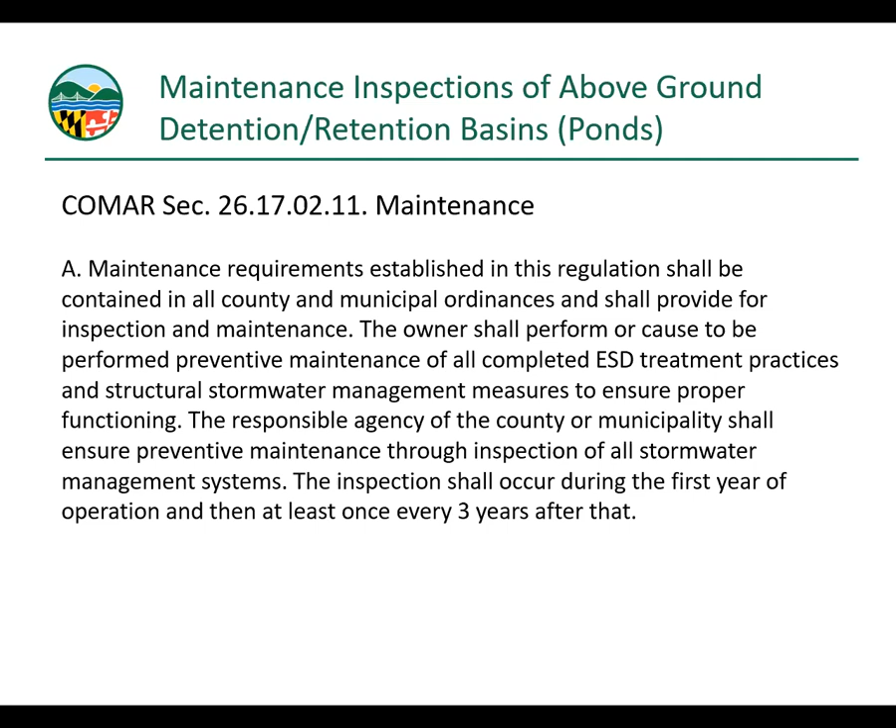So to kind of build on that, why are we doing these inspections? Well, as I just said, the law requires it. Your county and municipality shall provide for inspection and maintenance of stormwater facilities. There's many ways to get that done, as I mentioned.

Safety. Poorly maintained detention or retention facilities are a hazard to life and property. We don't want these embankments to fail and cause an uncontrolled release of energy and water downstream. For those of you operating under an MS4 stormwater permit, in order to get the credit for your facilities, they have to be in proper operational condition if they're working. And again, this is only applicable if you are an MS4 permittee.

Liability. Facility owners can be directly liable for any damage or injury resulting from a facility failure. Nobody can afford that. Nobody wants that on their conscience. So we're going to do everything we can to make sure that we're not the cause of any damage, injury, or deaths downstream. And finally, but certainly not least important, is stewardship. Why are we all here? The mission is to protect the environment and reduce the impact of human activity on the watershed. Most of us, I hope, got into this water quality business because we've got an interest in maintaining a quality environment and a quality watershed.

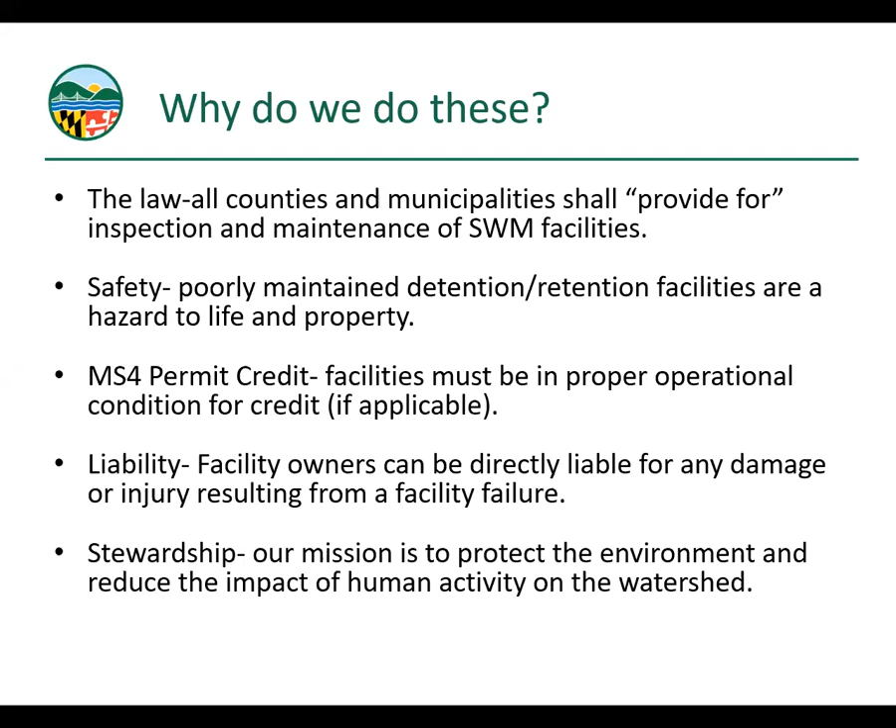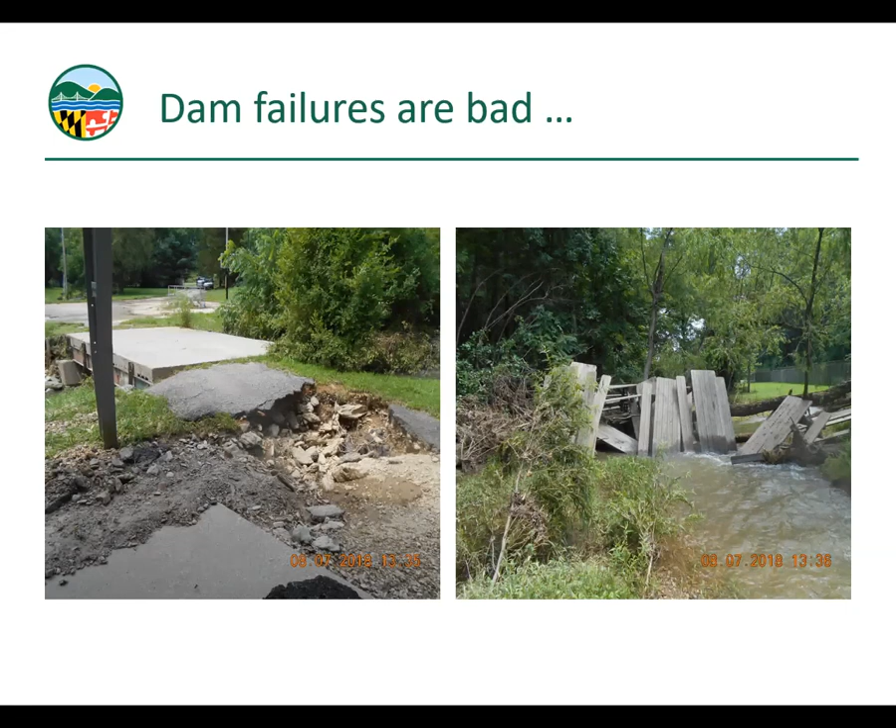So, to avoid problems, we need to inspect our facilities. Now, planning and inspection. Personally, I like to review every piece of data I can get my hands on. If you're a municipality or jurisdiction, you probably have a file or a folder on all of your facilities. Let's hope so. And in that file or folder should be all the history of the facility, starting with the construction documents and the as-built package and plans. I like to review them if they're available. If there are any changes or conditions encountered during construction that required a change to the design, layout, or means and methods, that should all be documented in the as-built package. So that's where I like to start.

Any additional data I can get my hands on, prior inspection reports that are in the file. Personally, when I'm doing an inspection and I've got a set of paper plans in my hands, I make a lot of notes on them for the next inspector to use. Google Earth has a provision where you can find a site, look at it from the overhead view, and go back in time using the timeline feature at the top. I find it interesting and helpful to see how the facility has, for lack of a better word, evolved over time.

Site contacts. Some of these facilities are going to be out in the public where you can just walk up to them. Some may be on private property, and some may be in an industrial facility behind a fence where you need an escort. Reach out to your site contacts, make your appointment, and make sure they know you're coming.

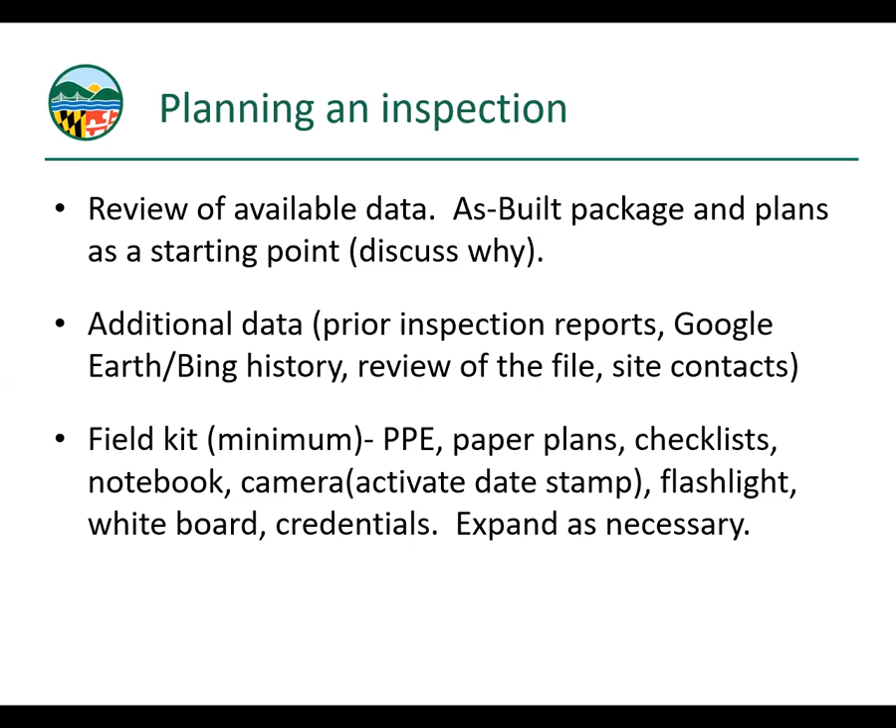And if they need to meet you there or give you access, get that set up. I'm going to briefly jump to the next slide to talk about the field kit, because this is pretty straightforward stuff. Your PPE, everybody's got to have their personal protective gear. I'm not going to speak to the conditions we're currently operating under as far as COVID, but everybody's got their own SOP for dealing with that at the moment. I've got my hard hat, my vest, and a digital camera, probably one of the most important tools you can carry with you.

When I take digital pictures, and you can't take too many, trust me, I like to set up the date stamp so it's visible on the image, so it's visible in any report or documentation you turn in. I've got a clipboard here for notes, my notebook fits right in my back pocket, a tape measure, my credentials, a screwdriver which is handy for probing the bottom of metal pipes, and there's also a pair of boots back there.

Again, this is the very basic kit, so you can do a quick visual inspection. These inspections could get quite invasive, but we're not going to go that far today. We're going to hit the high points. Anything that needs to be followed up on will be documented in your report.

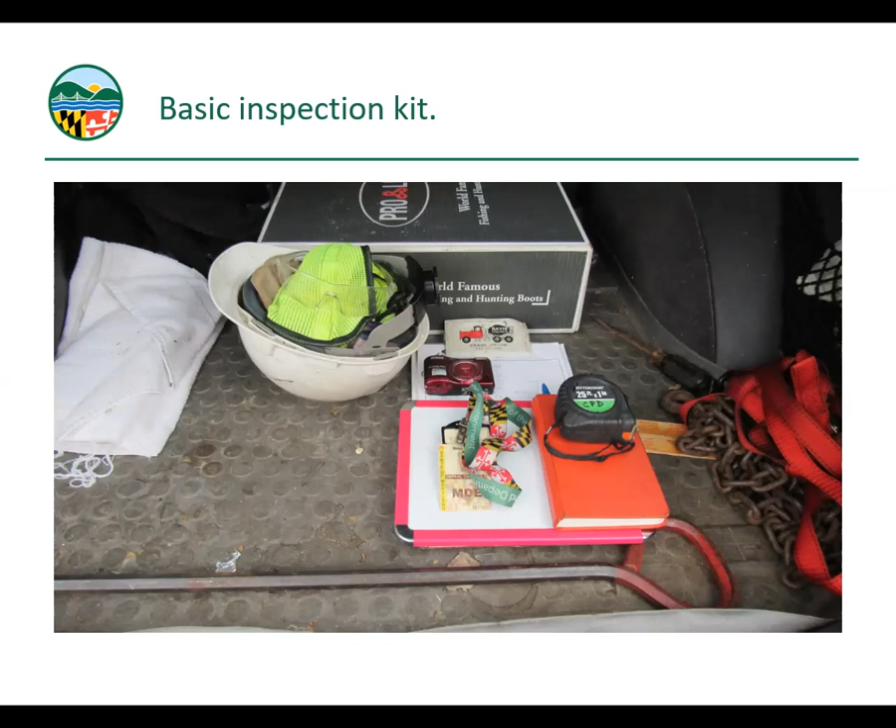So let's go to the site. All right, here we are. I like to start with an overview, just stand back and look at the facility if possible, and just take it all in.

Again, this is dependent on how your particular system and protocols are set up. But the fact of the matter is, if you can't see what you need to see, you can't inspect it.

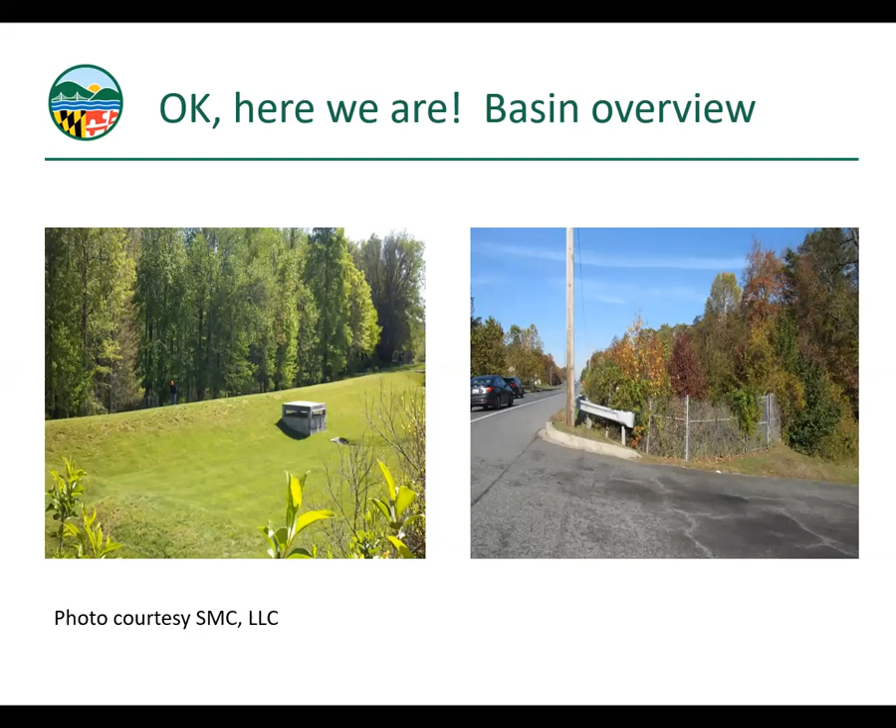And just a little piece of history, I actually worked on this particular pond when it was constructed. It has to have been over 20 years ago at this point.

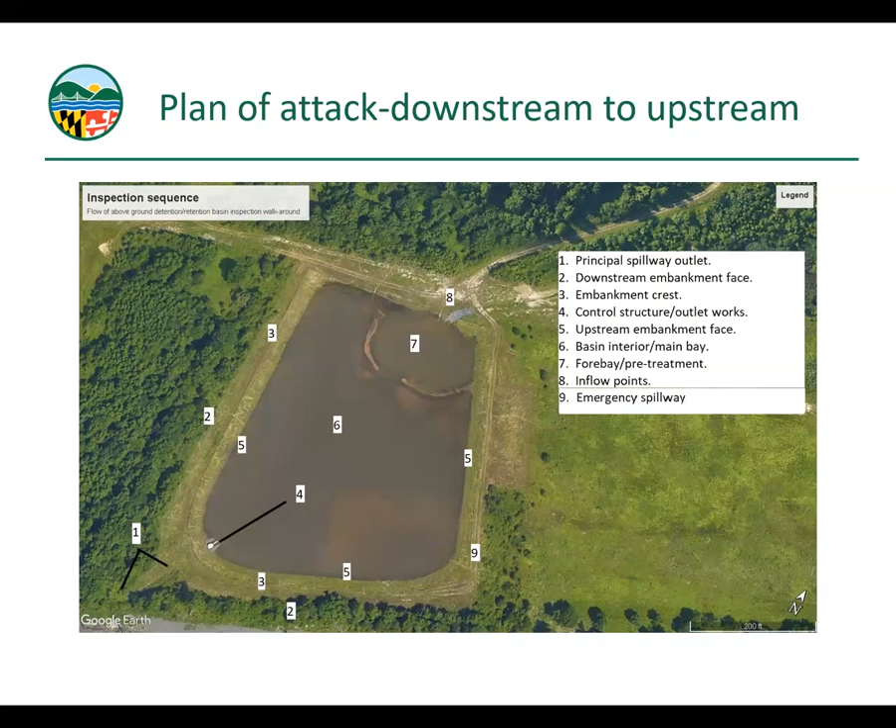So starting at the outfall and points beyond. This example, we've got a corrugated metal pipe principal spillway with a flared end section. Other than the trees being pretty close to it, it looks okay from this vantage point.

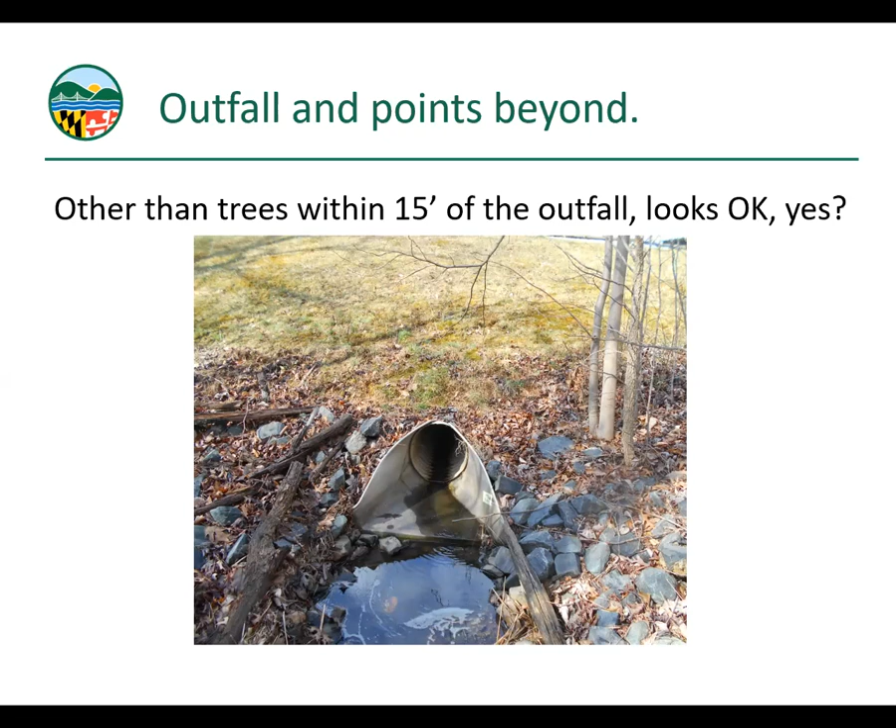But if we look downstream, what do we see? Pretty significant erosion head cutting here in the left-hand photograph. In the right-hand photograph, looking back upstream, we can see the armor at the outfall has been swept away. The filter cloth is hanging, and this cut is probably 6 feet or better.

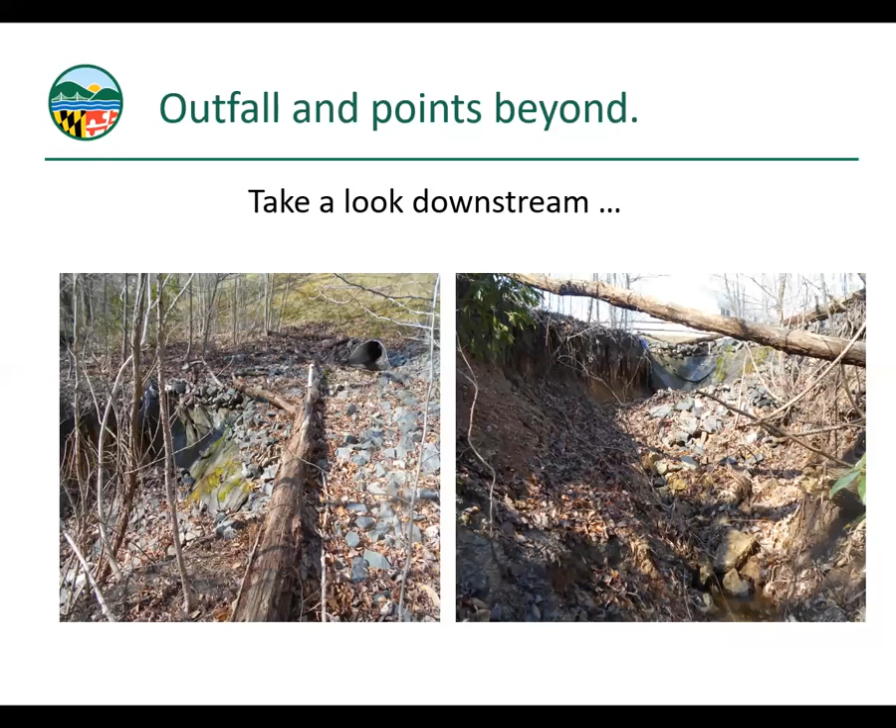Document it, take your pictures, get it into your report. We can follow up later on why it's happening. The important thing for this exercise is to document that it is happening.

How about the principal spillway? This is a corrugated metal spillway. The one on the left, it looks pretty good. It's got some surface rust in the bottom. This is a situation where I would probably probe that with my screwdriver to make sure that the metal is still intact and solid. The one on the right, well, it speaks for itself.

The entire bottom of that principal spillway has rusted away. Water is now free to carry away embankment material, and we have a perfect situation set up here for piping and a potential failure of the embankment. Again, it's pretty clear what the solution here is. The pipe needs to be replaced, but we'll speak to that a little further along.

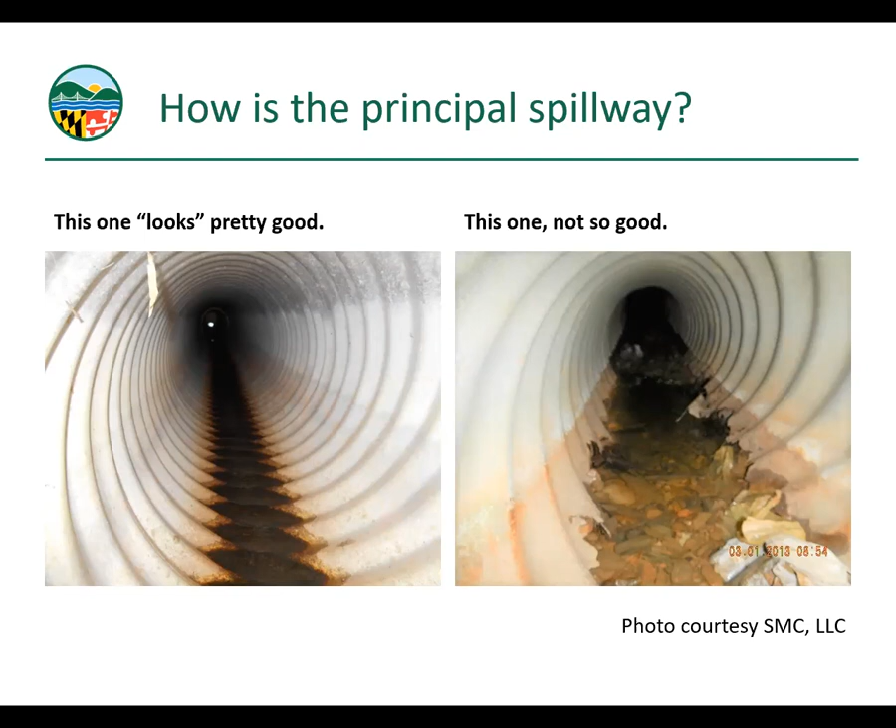Concrete spillways can have issues too. Something is blocking this spillway or is restricting it at this pipe joint. Again, in the course of this inspection, we're not going to crawl up in the pipe and see what it is, but we're going to document this. We're going to note it in our report, and it needs to be followed up on.

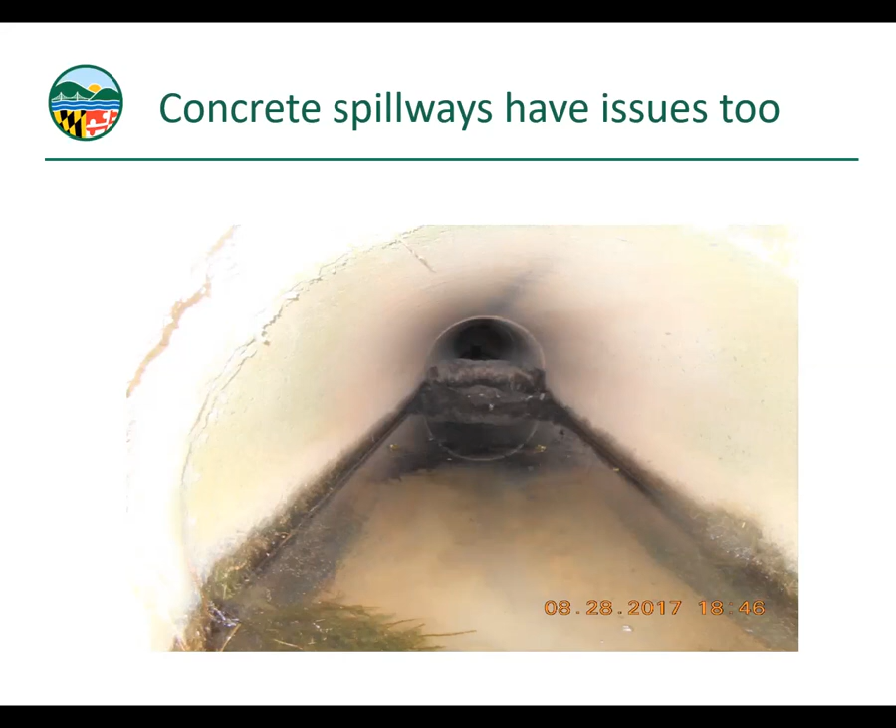Moving along, what are we looking for? A quick list. As noted, the condition of the spillway invert. What kind of shape is it in? Again, these corrugated metal pipes, folks, that have been in 20 to 25 years, maybe 30 at the outside, is their expected service life. They're going to start failing, and I certainly did quite a bit of work fixing these in my previous lifetime.

Joints, pipe joints. Are we getting soil coming in? Are we getting roots coming in? Are the joints lined up, or have they shifted and displaced? Again, if you've got soil coming in, you may very well have a displacement at the joint.

Egging of metal and plastic pipe, and I've got two symbols here on the right. One of them is lovely round, just like the pipe is supposed to be, but the one to the right, you can see, has what we call egged. This typically is found in corrugated metal pipes, especially larger ones. Once we get up above 36 inches, 48 inches and up, if the contractor gets his heavy equipment too close to the facility, or if the way he places his backfill is not done in a conscientious and careful manner, we can displace that pipe, and it can be bent out of shape, literally bent out of shape. That's a problem. It needs to be documented.

Misalignment. We noticed in Charlie's presentation, as he was looking up from the downstream end of a principal spillway, had a nice full moon at the far end. That tells me the pipe is straight. But if I'm not seeing a nice round daylight at the far end, I've got this crescent moon here, as I describe it, the pipe is not straight anymore. Again, it may or may not be a problem. It needs to be documented. It needs to go in your report.

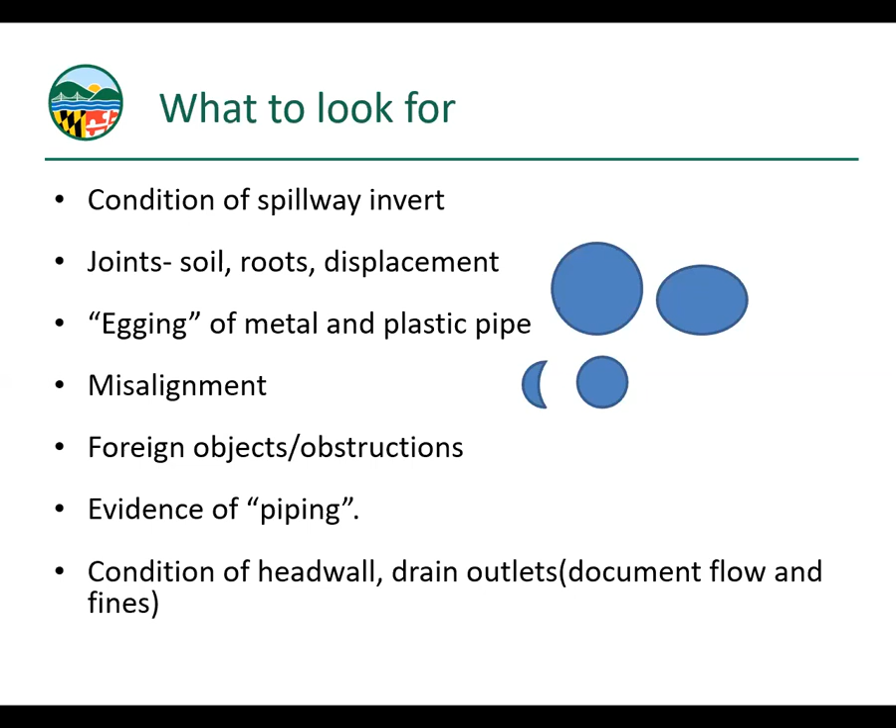Here's a photo of a head wall with drains. This particular example is still in sediment and erosion control mode, but the principle stands. We have two toe drains, one on the left, one on the right. The one on the left has mud coming out of it - it's a problem, needs to be documented and followed up on. If there was actual water flow, I like to get an idea of the rate of flow - this might be a guesstimate, or you might measure it over time. The one on the right doesn't look too bad, but we're not sure. We're going to follow up on this and see what's going on.

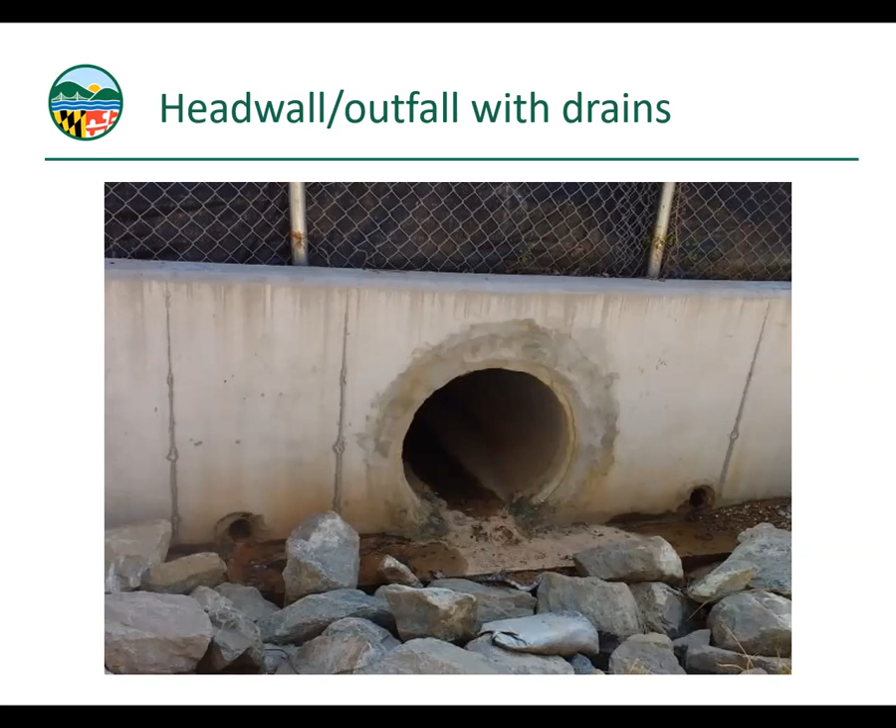Downstream embankment face - it has to be clear in order to properly inspect it. What we're looking for is animal burrows, erosion, slumping of the soils, wet areas or seepage, boils - that would be water bubbling up at the downstream face, maybe carrying sand or other material with it. Woody growth and bare soil, just to name a few.

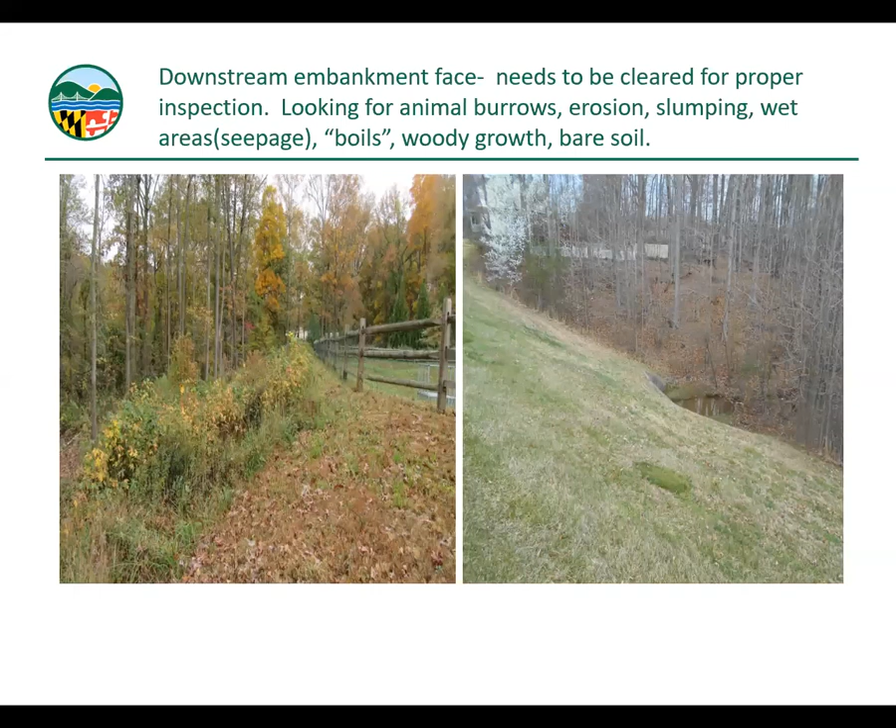Slumping and erosion on downstream face of embankment - these are pretty significant examples, though they may not always be quite so obvious. On the left, we've got obvious cracks opening up in the embankment as it slides down the hill. On the right, we've got all kinds of things going on: trees on the embankment, slumping or settling around the spillway pipe. This may be due to piping, or due to poor backfill - we don't know. We need to document that there's a problem and follow up on it.

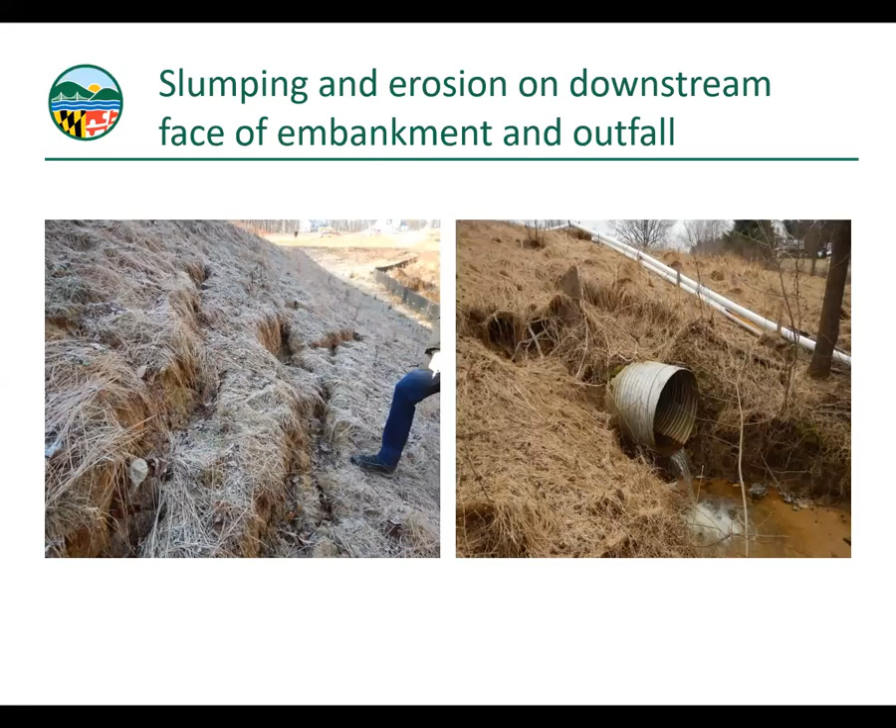Woody growth - we've had a lot of chat about woody growth today so far. The regulations are very clear: the dam owner must maintain all areas of the dam free of trees and woody vegetation. This includes 15 feet within the upstream and downstream toe of the embankment, within a 25-foot radius of the control structure, and within 15 feet of any abutment contacts, outlet, spillway area, and plunge pool. There's also additional language dealing with the emergency auxiliary spillway channels - the point is they can't be restricted, they can't have woody vegetation in them. The facility needs to be able to perform as designed. If you find any of this, even if you're not sure if it's kosher or not, document it. Take your pictures, write it down. Everything can be followed up on.

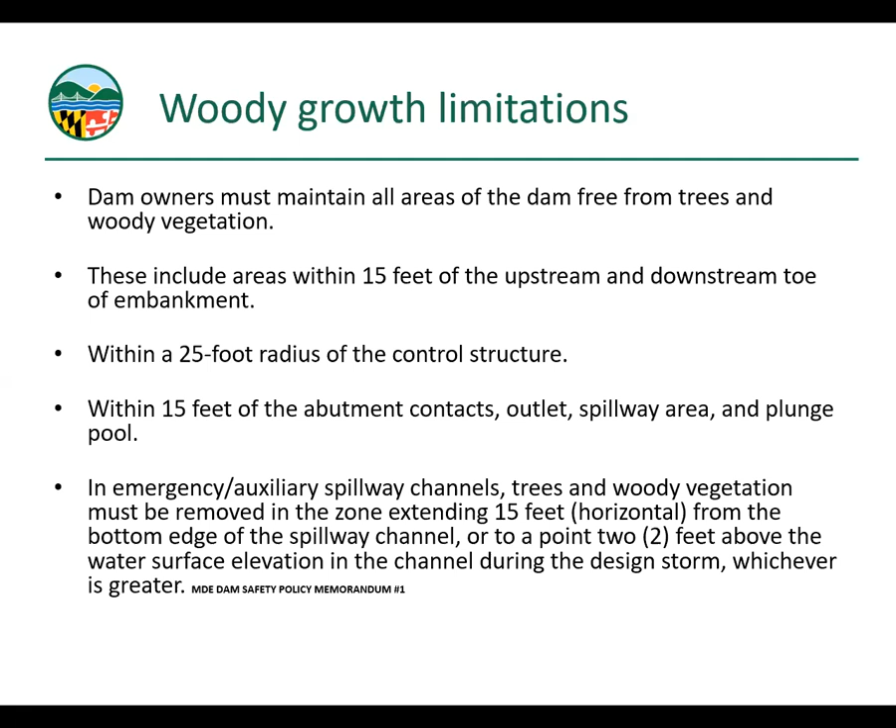Looking at the embankment crest and upstream face. Again, we're looking for slumping, animal activity or burrows, sinkholes, whirlpools, woody vegetation, bare soil, eroded areas, backwater into the inflow pipes.

Backwater is an interesting question. This is where a review of the plans is helpful. Some facilities are designed so they are intended to have backwater into the inflow pipes. I'm not an engineer myself, so I don't necessarily know what would drive a design like that, but I've seen it shown on the design plans. So again, that's something that would normally be a flag, but it may be okay. We have to know what the design intent was.

On the left here, we're not sure what's happening. This could be an old animal burrow that's collapsed, or it could just be a slump or an eroded area. We don't know, so we're going to photograph it, document it, and it's going to go into our report for follow-up.

On the right, we've got a weir wall. We talked about weir walls as control structures. It's a pretty big one, probably about 40 to 50 feet across. You can see at the top, we've got two groundhog holes. The groundhogs not only provide a conduit if water probably can't get that high, but if it did, it would certainly get into the embankment, weaken it, and could potentially come out the other side, depending on how far the burrows extend.

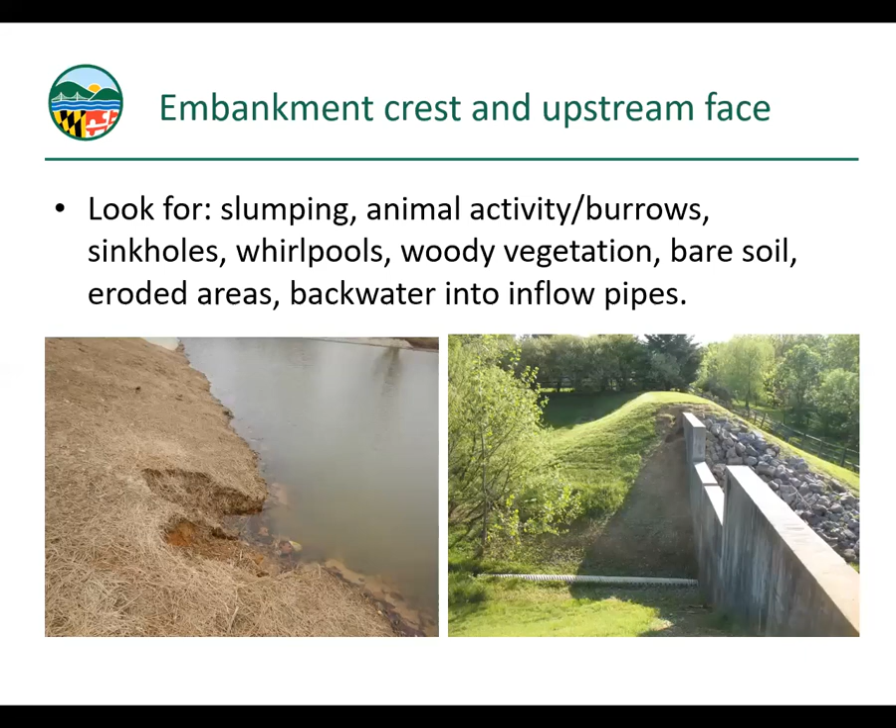The burrows have also generated a lot of overburden from the groundhog's excavation work, which can potentially clog up or compromise any low flow apparatus that we have in this facility. Again, document it, get it in the report, and we'll follow up on it if need be, and determine what the best course of action is.

Control structures, quite a variety here. Top left, we've got the classic corrugated metal mushroom that we're all so familiar with. Top right, a very basic weir wall with a low flow orifice.

Something to note here, this fence has metal mesh behind it. It's not just a wooden fence, it's got a metal chicken wire backstop. This is potentially a problem. This is a very low weir wall, but should there be a high flow event and debris gets carried down here, it won't be able to pass over the top of the wall. It's going to get caught in that chicken wire. This is not a good idea. It may be on the original design plans, but as an inspector, flag it, make a note of it. It may need to be removed, or it may be decided that it will be removed, but let's make sure everyone involved knows it's a potential problem in the field.

Lower left, this control structure is basically a combination of a concrete spillway and a tiny little weir wall. It should be clear, the little low flow orifice should be clear. There's other sediment built up here. Document it, make a note of it, put it in the report.

On the right-hand side, lower right, the classic concrete control structure with a metal trash rack on top. One thing to note, it may not be very visible in the picture, but there is woody material sitting on the ledge, which tells us that at some point this facility filled up with water to the point where it was going over the crest. That may be a clue to investigate the low flow and make sure it's open and operating as designed.

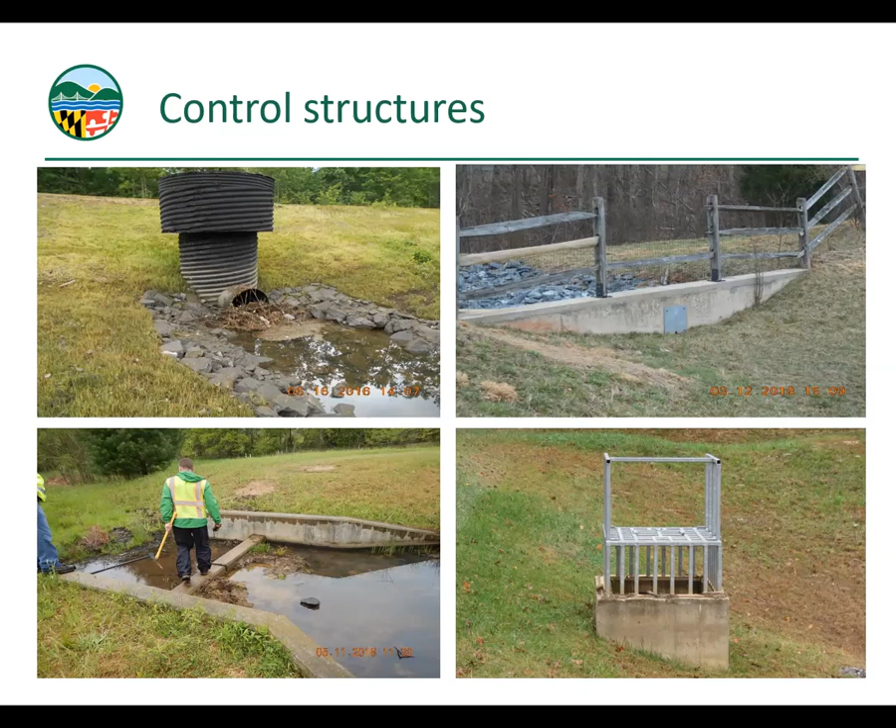So as far as control structures, we're looking for structural integrity, rust, leaking joints, spalled concrete, cracking. Is it plumb? Has it settled? If a control structure starts to rotate or settle, all the joints are going to open up, and it's going to be very problematic. If they have manhole covers, sometimes they tend to disappear. Are they there? Are they supposed to be there? Make sure they're there, and document them if they're not.

Hydraulic function: is the low flow clear? Are the weir openings clear? If there are dewatering or drain valves, are they properly configured? More than a few ponds out there were designed to be wet ponds, but nobody ever closed the drain valve, so they've never developed a permanent pool. Again, this is where your awareness of the design intent and design plans comes into play. Valves need to be exercised; if they don't get exercised, they will stick, and when you need them, they won't work. So there should be some sort of record of exercise, and if not, maybe someone needs to start it.

And lastly, is the interior clear? The interior control structure can collect debris. Debris can also be placed there by our industrious friends, the beavers. They love to stash food in any underground or box structure if they've moved into the area. Again, this will totally compromise the hydraulic performance of your facility, and we could end up with all sorts of bad things happening, the worst of which could potentially be an uncontrolled overtopping of the embankment.

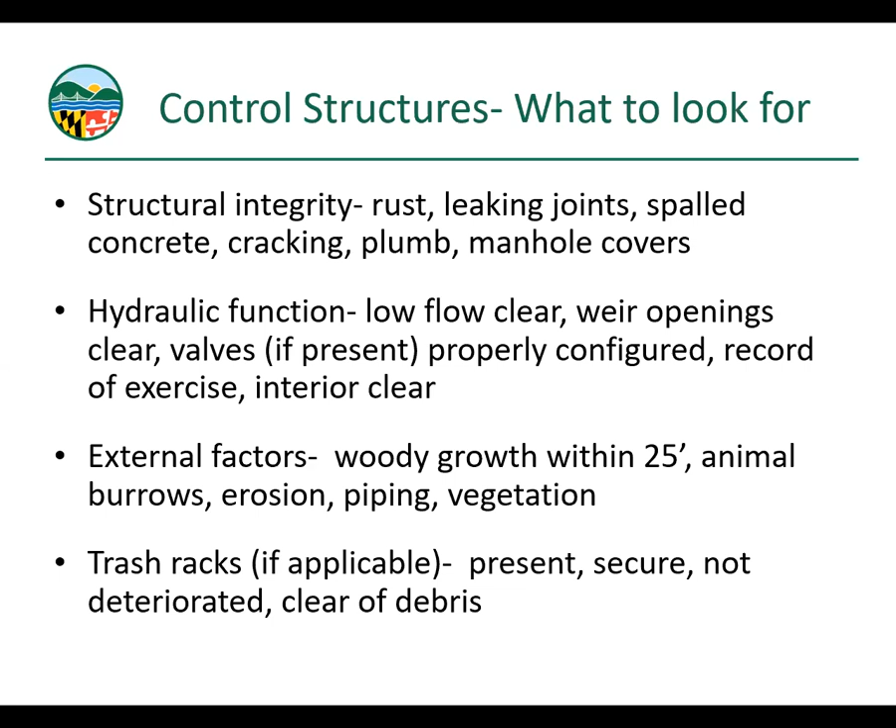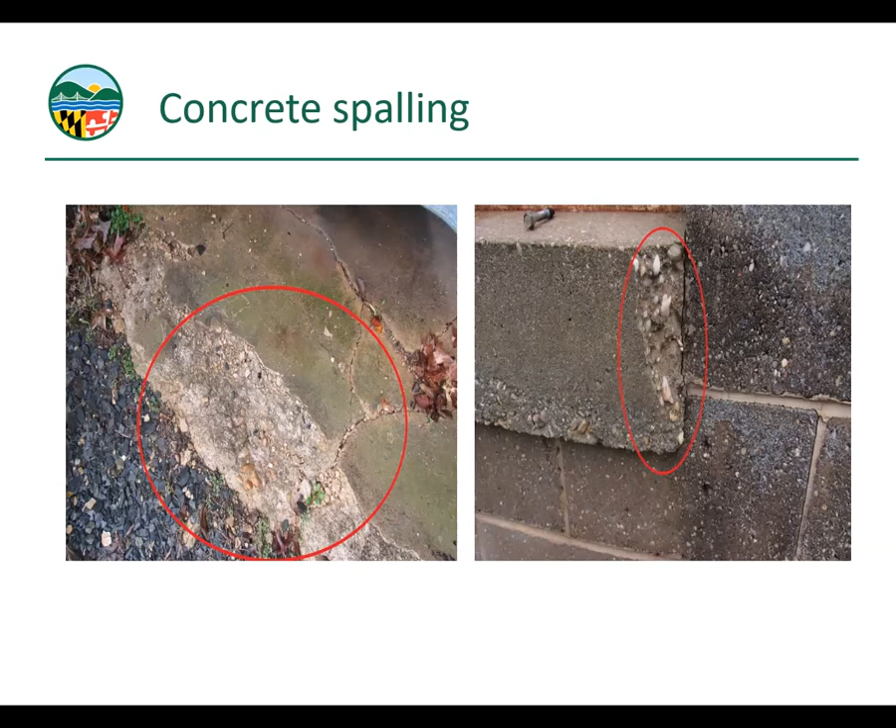Just two quick shots here of concrete spalling. This on the left is a slab, a garage slab. Again, you can see the finished surface here, but it is flaked off and exposed the aggregate and the unfinished surface underneath. Same thing on the right. This is a concrete lintel under a window in a block building. The corner of it has flaked off or cracked off, again exposing the aggregate underneath. Again, just for folks who might not be aware of what spalling is, these are two quick examples.

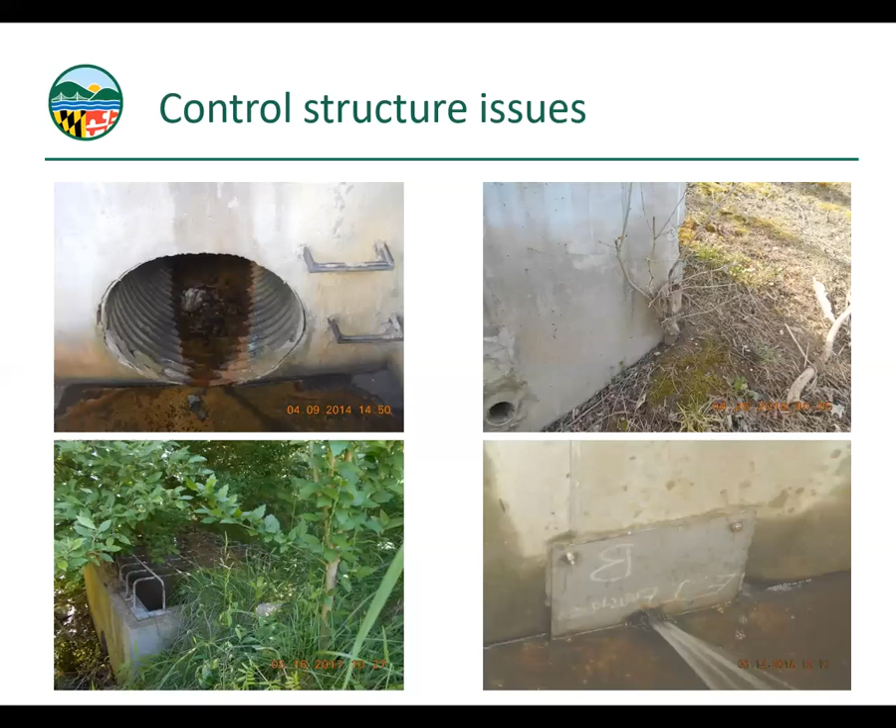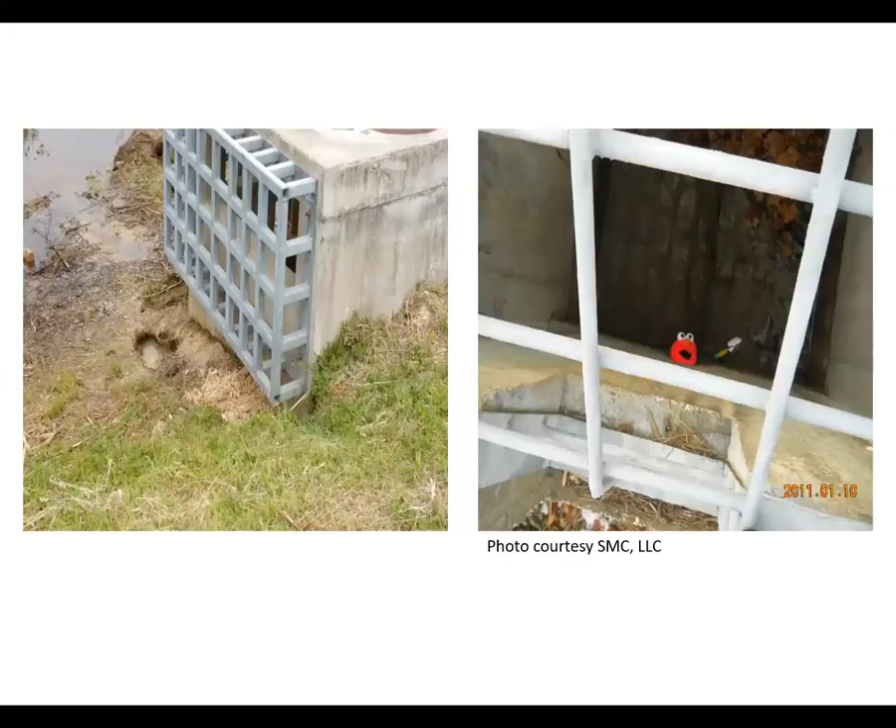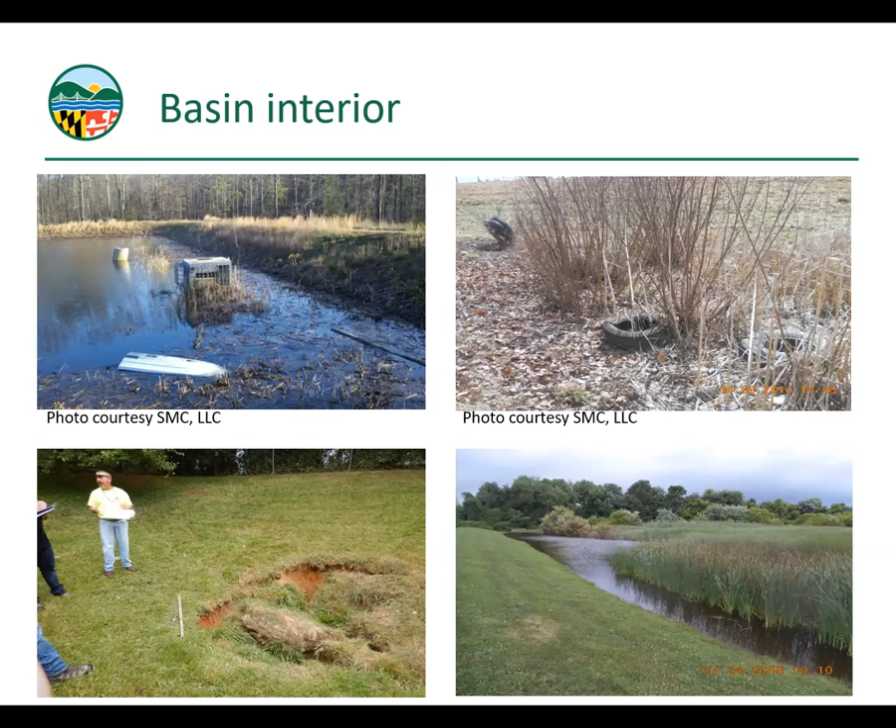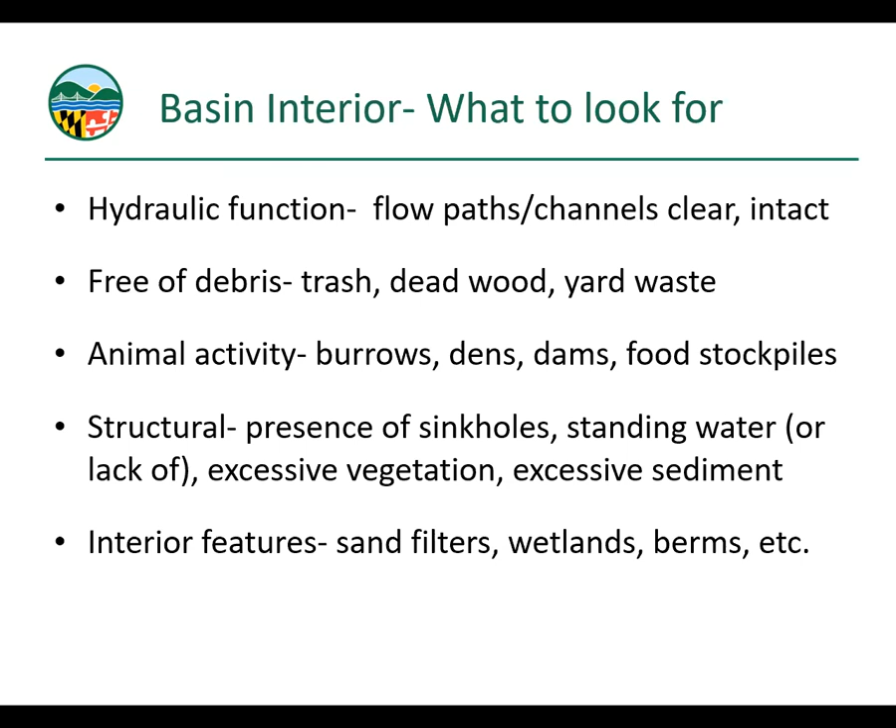Forebays, this is about going to wrap it up. Forebays, pre-treatment and inflows. If we have sediment deposition at an inflow, that needs to be documented, needs to be looked into.

If it hasn't rained for a few days and your forebays are holding water, there's a problem. This needs to be documented and followed up on.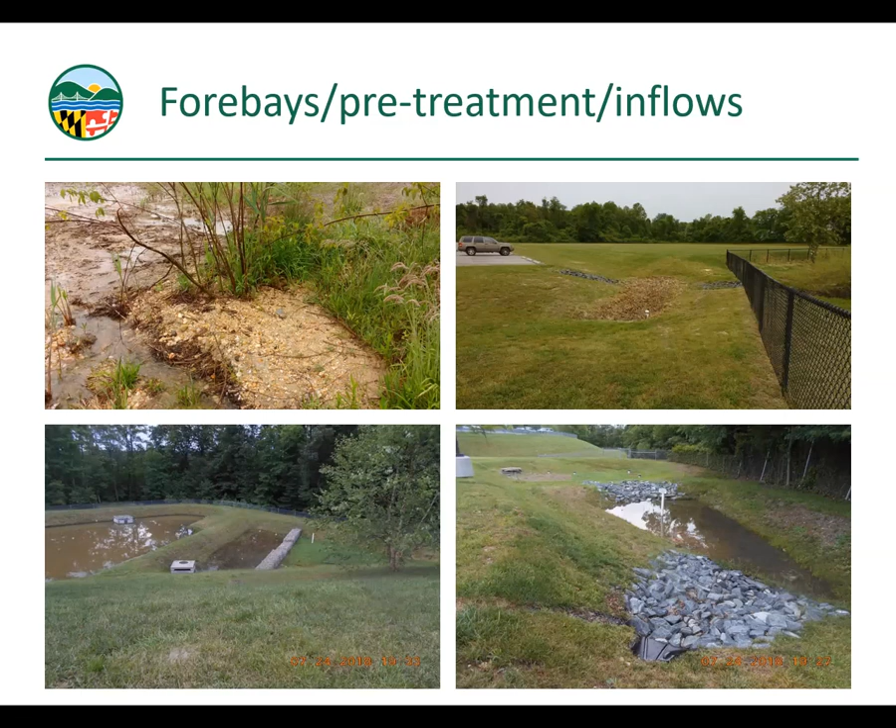Again, you can't take too many pictures. It all goes into the report. And we just talked about this.

Again, hydraulic performance - are they dewatering? Is there no short circuiting around berms or weir walls? Check sediment levels, trash, evidence of illicit discharge or upstream problems, and structural issues - are the berms intact?

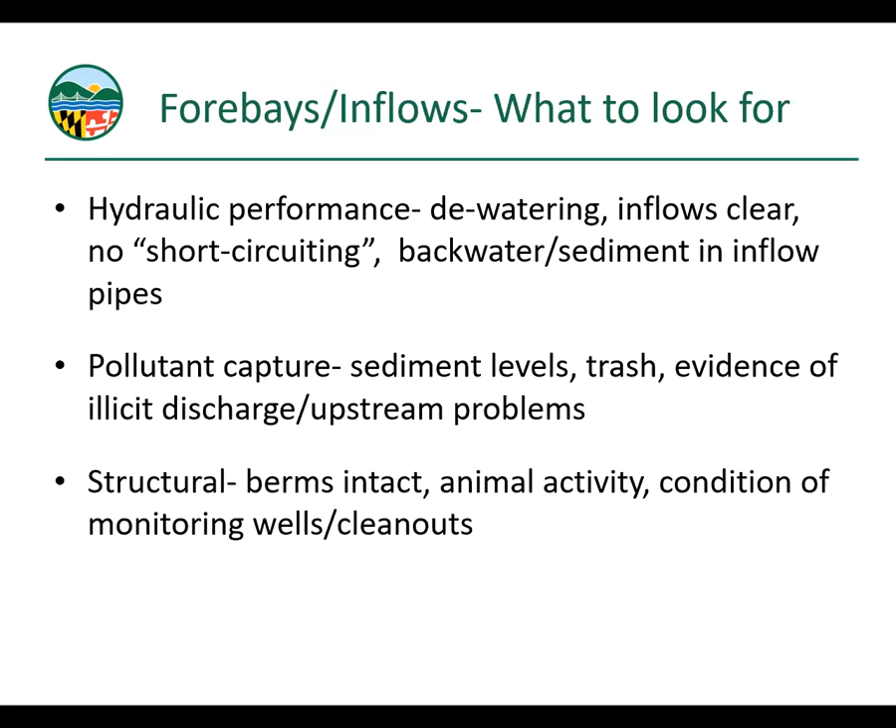Do we have groundhogs or beavers? Monitoring wells should not be broken off. Here are two forebays with bad issues.

The one on the left is restricted and clogged up. The one on the right is not only eroding, it's about to fall off the end of the pipe. And this staining indicates we've got something unhappy occurring upstream that should be followed up on.

Document it, get it into the report.

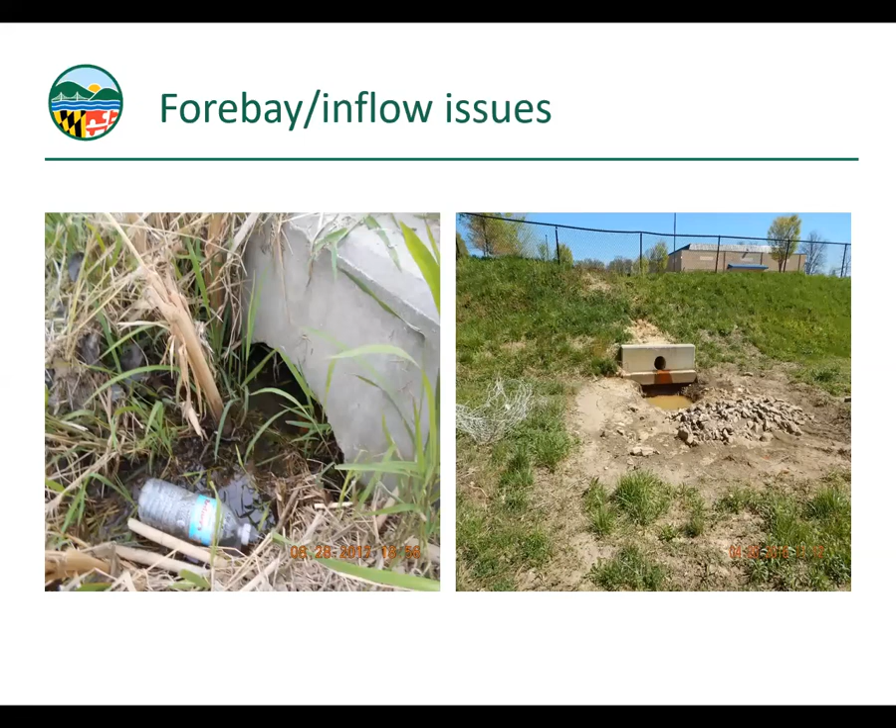Final thoughts: safety is priority one. Safety for the public, for the property owners, for the downstream habitat, and the inspector. Your jurisdiction should be getting you the safety training you need for the level of inspections you're going to be doing. As I said before, we're limited in scope due to time.

Structural issues were the main factor today. I could probably speak for 3 or 4 hours on inspecting facilities without any problem and still be short on time. Please reach out to me or anyone at MDE.

If you have questions or want discussion on maintenance performance inspections on any kind of BMP, not just basins, reach out. We're working on some guidance documents for you guys. They're in development, they're coming. That's all I'm going to say about that. So they're coming, and as always, tell us what you need.

What are you looking for? What are your training needs as far as field inspections and reporting? And with that, boom.

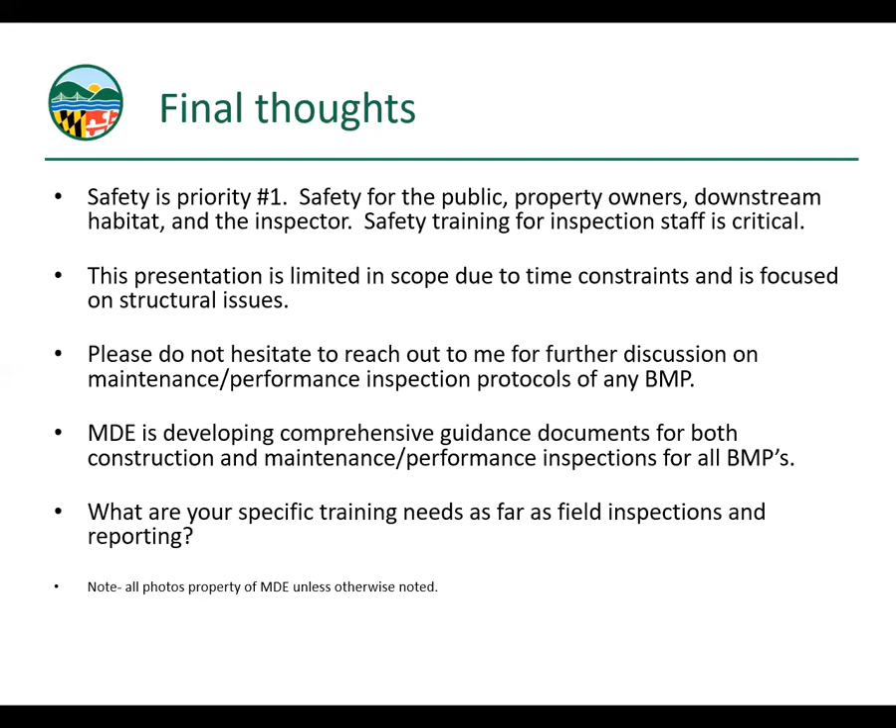For mowing of slopes, isn't vegetation considered a stabilizing mechanism against erosion of slopes? Why is mowing preferable to allowing roots to take hold?

Well, in the case of woody vegetation, the more roots that get into the structural embankment - and I'm talking about the embankment built to a specific set of construction standards - when that vegetation dies, those roots will decompose. The tree trunk, if there's a tree trunk, will decompose and leave voids. Over time, this will continue to chip away or erode the integrity of the embankment. You need to be able to see what's happening. So we would encourage a robust growth of turf, but beyond that, it really limits our ability to see what's happening and to keep control of the structure.

Okay, and how should trees be removed from a dam? Should all trees be removed? Does it depend on a certain diameter?

That's an outstanding question, and it has a lot of answers. I'm going to defer - I don't mean to shirk it, but it's farther than we can get into here - to Mr. Roach and Mr. Wallace from the Dam Safety Shop. I believe they have generated very specific guidance on that very topic that is available to anyone who would want it.